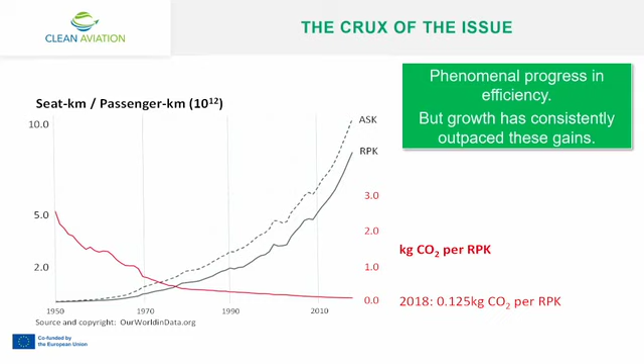In the installed base, we've seen an 80% improvement in fuel efficiency and energy efficiency. I don't know of any other sector that can compare to that. From 1989 to 2019, a 30-year period, looking at the exponential lines here, there's been a quadrupling of the aviation system in volume, and only a doubling of emissions. For a decade or two we've been able to say that's good performance, and it was good performance, but it's not enough.

If we're looking at a climate-neutral future, it won't suffice. So we know what we need to do. But where do we start? And how do we do it?

There's an old saying that when you're looking at numbers, there are such things as lies, damn lies, and statistics. I like this graph because it shows data from the International Council on Clean Transportation, the ICCT, and it tells us, I think, where we can find the next steps. So where do we go first? I think it's very revealing.

You'll hear very often that 80+% of the aviation system transports people or goods over distances for which there is no alternative mode of transport. It's probably true. But you'll hear it morphed into the statement that 80% of aviation is long haul. That's absolutely not true. Or that 80% of aviation's emissions are long haul. That's equally not true. It depends on how you define long haul. If I'm in my car, long haul is beyond Amsterdam, Brussels, because it gets annoying to travel further. If I'm traveling by rail, I don't mind Amsterdam-Paris or Brussels-Lyon, but then it gets a bit annoying. I think the consensus in aviation is that long haul is transcontinental as a minimum, maybe even intercontinental.

This chart is enormously informative because a third of aviation's emissions are on flights below 1,500 kilometers. A further third of those emissions are on flights up to 4,000 kilometers. And only a third are actually on flights with a sector length over 4,000 kilometers. The trend, if you look at 2050, numerous scenario studies actually point towards a further concentration in the short, medium range environment. That's important for us.

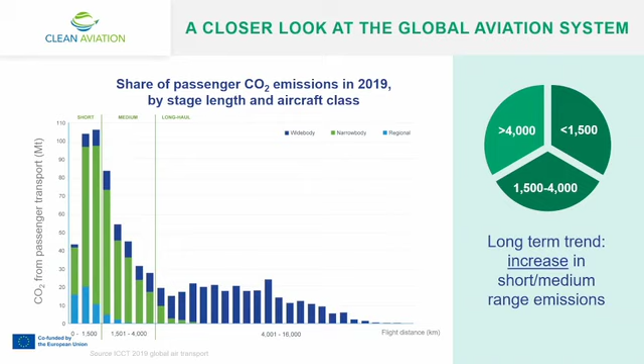Now, I know you could take the political line that we just stop flying over short sectors. And I would say dream on. If you look at the number of city pairs that aviation can touch, and the efficiency of doing so profitably, without massive infrastructure investment and the life cycle effects of that infrastructure, short-haul aviation will not disappear.

You can also look at it another way, cumulatively. Here I've overlaid the fuel with the actual cumulative number of flights over different segments, up to 500 kilometers, 1,000, and subsequently. Same ICCT data. The overlay comes from the Sabre computer reservation system, manipulated with our thanks by DLR, the German Aerospace Center. A couple of things are pretty interesting.

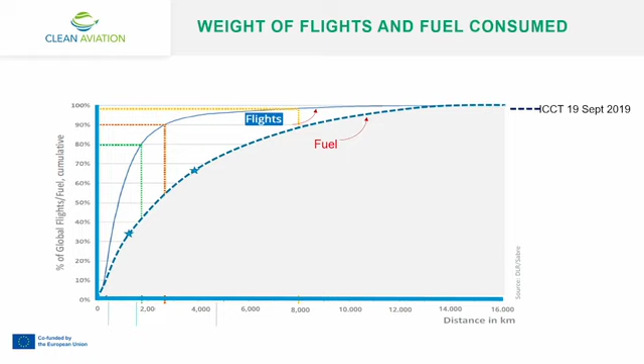Only 1% of flights are over 8,000 kilometers in length. We design long-range aircraft for 8,000 nautical miles. Ultra-long haul is therefore an even more marginal market if you're actually looking at city pairs. It used to be the case that flights over 8,000 kilometers consumed roughly 20% of fuel. But I think, again, it's a recognition of the performance of the sector that if you now look at the so-called big twins, the A350, the Dreamliner, the 787, it's actually a bit less, towards 15%. But it underscores where the first big steps are needed.

Again, another way of looking at this, so I've complicated the slide by looking at that. How can we move forward? One thing is, we've heard for decades that there really is no alternative to drop-in fuels. But if we look over a 30-year horizon, we can and need to be much more ambitious than that. We need to step away from things we consider sacrosanct or an idée fixe. Road transport has far more and much denser networks.

Transforming is more challenging. There are many more petrol stations than there are airports, believe me. But aviation already has several fuels, and it never really had only one fuel. Piston aircraft don't use the same fuel as jet aircraft. Obviously, Jet A is dominant.

But frankly, if Henry Ford had considered drop-in fuel the only alternative, the Model T would have taken a lot longer and would have burnt coal. It doesn't work that way. As they say, it's different strokes for different folks.

We think new architectures will find their way into the market, and we think it's clear that this will happen at the lower end of aviation - shorter range, smaller aircraft, short commuter, general aviation, maybe even urban air mobility. There's going to be a role for pure electric.

Some of that will be battery, some pure electric based on a hydrogen fuel cell. There's definitely a role for hybridization. We think there's a role hydrogen can play beyond fuel cells, in terms of direct burn gas turbine environments. As others would say, the rumors of the death of gas turbine are premature.

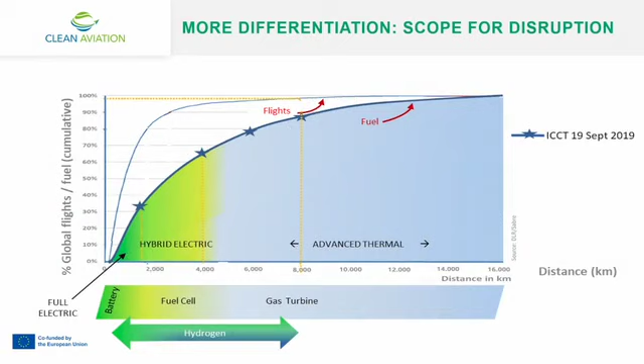They're going to be around for many, many decades. But the system is big enough to accommodate different solutions, and that is what we believe will be the case.

This is the only formula I'm going to show, and I will make no attempt to resolve it. It's classical - it's the Breguet equation. Usually it's used to determine the range you'll get out of a design given a certain payload, or conversely, what payload you get for a certain range.

But why am I showing it here? It shows the traditional levers we have decades of experience in and have made phenomenal progress in: aerodynamic efficiency, structural efficiency and weight, propulsion efficiency. The one constant throughout has been the energy density, and it can no longer be. We can't afford to maintain that as something sacrosanct, because it influences everything.

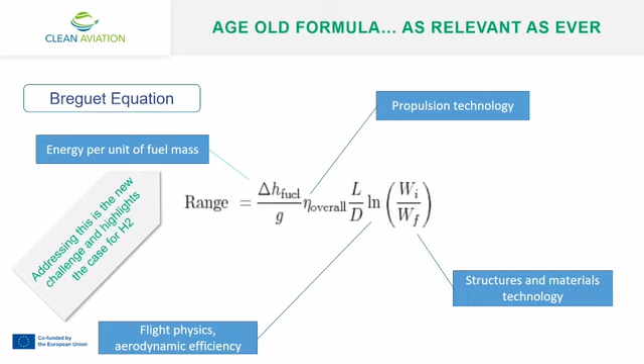It's often said that if kerosene hadn't existed in nature - which it doesn't, by the way, it needs to be refined - mankind would have invented it for aviation. It's pretty near perfect as a liquid fuel in the wings of an aircraft. But there are going to be other ways to solve the equation.

Now, stepping across to where to start and how we start - this is where I believe clean aviation can play a significant role, and I can get quite passionate about that, as can my colleagues and our members. As you well know, the European Union has declared a goal of climate neutrality by 2050, enshrined in its ambition and in law through the European Green Deal and the climate law. Along with the digital EU, these are the main drivers and pillars of the innovation cycle, of research and innovation, and therefore of Horizon Europe.

Clean aviation is an instrument within Horizon Europe. In the societal challenges, we'll find those all over the place - the Green Deal, climate neutrality, digitization. And a public-private partnership is a key instrument.

Clean aviation will build, as Axel said, on earlier work in terms of partnerships, so Clean Sky 2, building on the results, taking lessons also in how things were done and how to improve. And in the words of Sir Isaac Newton, we all know that when doing this kind of research, we're standing on the shoulders of giants.

So a lot of work previously, whether Clean Sky 2, whether in the important and significant work in national programs across the European Union area, or in earlier collaborative research work, many of the previous framework programs - all of this is relevant in terms of stepping stones towards where we want to go with clean aviation.

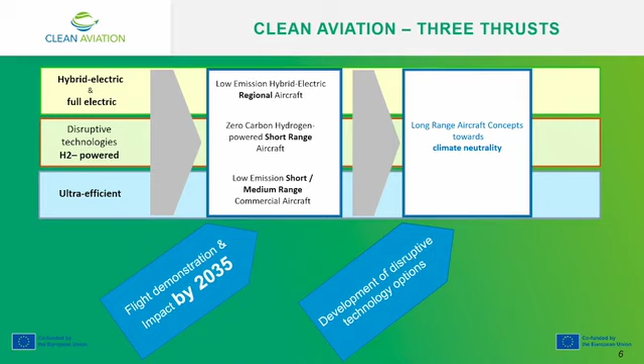I quote here John F. Kennedy. In his Man on the Moon statement at the time of the space race, he said, we don't do these things because they're easy, we do them because they're hard. A liquid hydrogen-powered commercial airliner, if that entered into service - if we fly that before the end of this decade - that is an Apollo-scale challenge. Europe's Man on the Moon moment is pretty much if we have that in service, and that's a European product. We should be darn proud of working on it.

Very briefly, the program structure. Our strategic research agenda, defined by the members, took a look at this and came back, very roughly, with a two-phase approach. First phase, up to roughly 2025-26 - our first call, as Axel mentioned, is a big bang, a big bite out of the first phase. That aims to cover a pretty broad palette, but linked to the three thrusts: regional, short-medium range single aisle, and hydrogen solutions. But it's a broader palette in terms of what concepts, options, and trade studies we need in order to determine the down-selection of things, because when we go from a study to a preliminary test, from a ground test to a flight test, the costs explode exponentially. So phase 2, from roughly 2025, will need a much narrower selection because we need to accelerate - we need to shift gears in phase 2 towards the end of the program, because we're looking at an entry into service prior to 2035.

Now, we can't go it alone. The program is 4.1 billion - that is, by the way, 1.7 billion in EU funding, 2.4 in private. So the leverage factor in doing this is very healthy.

But we're going to need to work on synergies, and I'll come to that in a moment. This ATO, authority to offer as it's often called, within this decade - because otherwise you won't have an aircraft entering into service in 2035 - is actually stated as an ambition in the regulation and is a key feature of this impact-focused program.

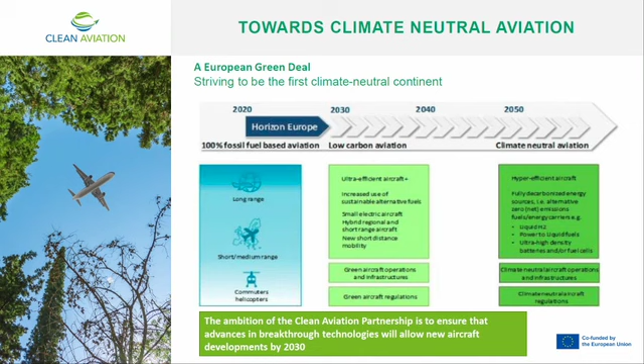But what is our contribution? What is our ambition in Clean Aviation? Our ambition, and part of the thrust that I will present to you, is to ensure that there are breakthrough technologies ready that will allow new developments by 2030. So we will have aircraft entering into service in 2035.

So these are the Clean Aviation three thrusts that Ron presented before. We will have these three sessions to give you a hint about the vision and what we are envisaging in terms of technologies for hybrid electric regional aircraft, for the short medium range, and also the disruptive technologies to enable the hydrogen powered aircraft.

This started with the strategic research innovation agenda that Ron also mentioned, starting back in 2020, creating a roadmap in order to achieve these goals of really having a product capable of entering into service in 2035 and able to replace 75% of the fleet. And the fundamentals of this roadmap are something I think most people in this room will agree on.

The fundamental point is that an aircraft is a very complex system and is safety critical. So if you want to introduce disruptive or innovative technologies so that they are ready for entry into service, for certification, you have to evolve in an integrated way and have an acceleration for technologies with demonstration and with an integrated view. That's why we have these two phases.

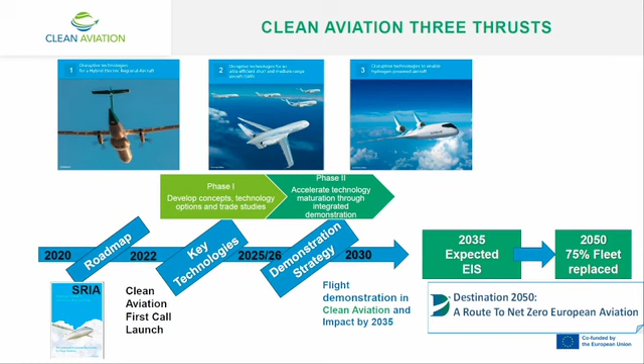And now focusing more on the short, medium range targets. So how we are implementing these objectives. First, which are the targets, and then how we are implementing them.

The targets are aligned to what has been presented before in other forums. So we are targeting to improve no less than 30% of the energy efficiency on a typical mission, compared to the 2020 state of the art.

For what is a typical mission that we are targeting? The typical mission is a segment capacity from 100 to 250 seats and up to 3,700 range. Ron presented some pictures on why we are focusing on that area, but just to give you a takeaway, this contributes to 2/3 of the global emissions for flights. So it's really an important area where we need to focus in order to bring impact, because Clean Aviation is an impact program.

And to do so, contrary to what we could do for smaller range, smaller missions where you could use hybrid electric solutions — and maybe I can recall for those who have seen the IFAR presentation this morning, the first one, there was a nice chart about the electrical battery limits — really, what the batteries can bring us, electric solutions as a single core energy source for short, medium range, are not ready, are not enough.

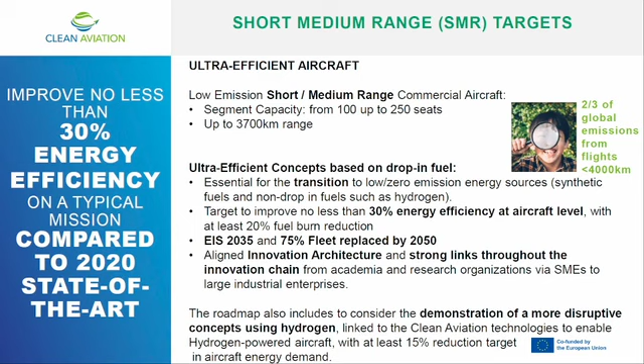To achieve all that, it's very important to have an integrated approach with an innovation architecture, making strong links between technology development and product development and certification. So we think our program could really be a forum where we can strengthen these links between academia, research organizations, SMEs, and large industrial enterprises.

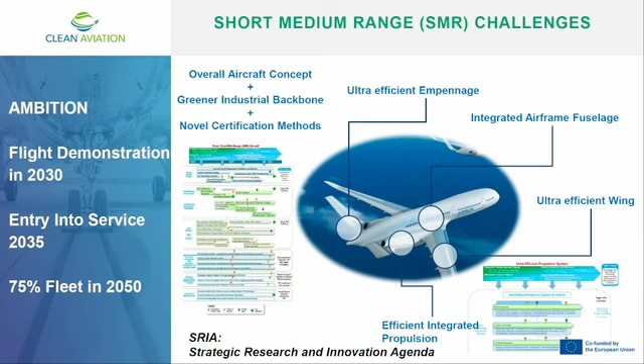Which are the challenges we have in front of us to reach this ambition? First of all, overall aircraft concept, also a greener industrial backbone so less waste, reduced manufacturing timeline, and novel certification methods, together with the classical ultra-efficient empennage design, airframe, fuselage and integrated systems design, ultra-efficient wing, and last but not least, efficient integrated propulsion systems.

If you have seen the call one that we have launched, maybe after what I explained it's clear to you that we have three main topics focused on short and medium range, up to 207 million, and then two transversal areas that will be focused on developing the aircraft concept and also the novel certification methods that are needed.

I will go a little more in detail about the type of technologies we are aiming for each of these topics. For SMR01, which is the ultra-efficient propulsion systems, the proposed solutions and technologies are expected to start at TRL 3 and be able to achieve TRL 5 at system level.

So they are ready for ducted or unducted engine architecture. Christophe was presenting before for Clean Sky 2 what are the types of architectures that have been explored. There are also core engine and combustion technologies investigation that are expected to reach TRL 4. There are three main areas for the benefit, which are clustered in smarter engines, lighter engines, and cleaner emissions.

Smarter engines - there are some examples here, like variable geometry, so pitch multi-blade devices, or finding the optimum conditions for different flight modes, electrical machines for the transmission systems, innovative thermodynamic cycles, or changing the way of controlling the engine, for example with artificial intelligence.

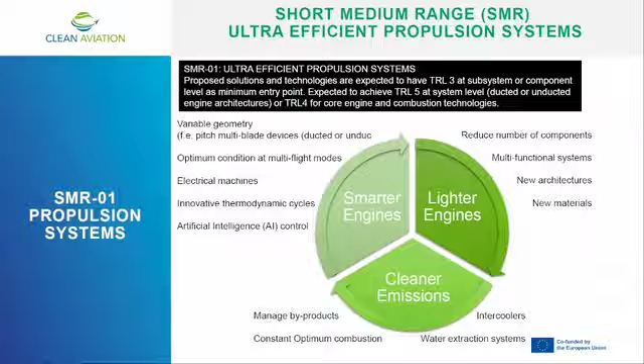And cleaner emissions, so not only CO2 but other types of particles that can be reduced, managing byproducts, creating new ways of dealing with the water extraction system, reducing contrails, changing the way of combustion so you always get an optimal combustion and reduce your emissions.

So these are the three areas that we will focus on in the propulsion systems.

For the ultra-efficient airframe, I put here together the wing, fuselage, and empennage, even if they are two different topics in our call. So again, some examples here, how we will reach a maturation for TRL 4 or higher in order to get ground test and also possible scaled flight test demonstration for these technologies.

So we aim to achieve new materials. The multifunctional fuselage was presented today - this could be like a taste for you about what could be.

Integrated structural elements, so the systems are even more complex in the new aircraft concept, so we need to get a more integrated airframe in the end. Modularized concept, something that is more standardized, more changeable, and we can evolve for the future to new configurations.

And then also optimization of load distribution in order to reduce the weight and the drag.

Sustainable industrial system - you remember I mentioned one of the objectives is also to have a footprint in the green industry, and what is the effect of the new technology that we're introducing in the life cycle of the technology.

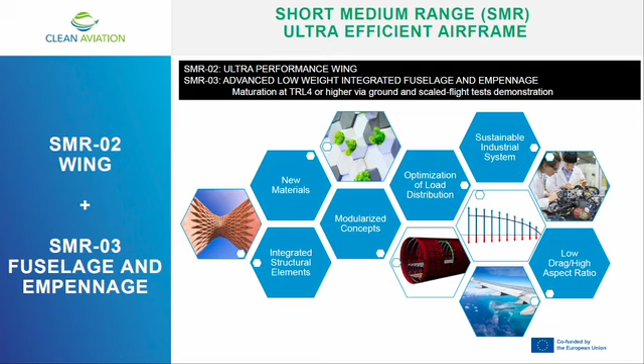And last but not least, of course, the low drag and high aspect ratio solution that has also been mentioned before from one of the Clean Sky 2 outcomes.

I'm so excited to go to phase 2 that I put phase 2 here, but actually we are in phase 1, which involves selecting from all the technologies that are promising and that we can evaluate for their impact on greenhouse emissions and on life cycle optimum solutions. We have to down-select with the view that this has to be integrated in a full aircraft concept, able to be certified.

And that's why we need to explore also new means of compliance, maybe challenge the requirements that we have. If we are asking for a high aspect ratio, as Jerome explained before, you are near the flutter area, you have to introduce flutter control. This impacts certification, and we have to take all these concepts into early design.

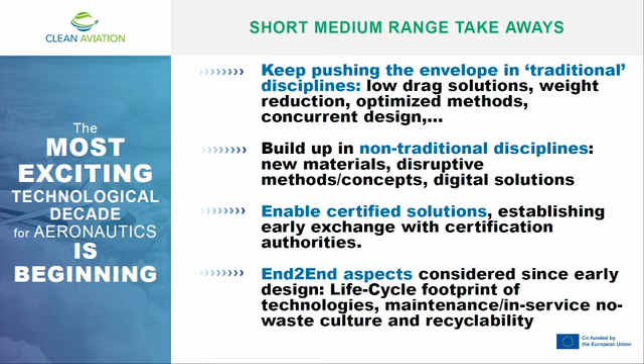Last but not least is the end-to-end aspects that we need to include in early design, in order to establish the life cycle footprint of the technologies we are offering. When you enter a new technology, you need to evaluate if this is adverse for the different systems in the aircraft integration and for the overall aircraft view, and the maintenance and in-service impact - if we are proposing the adequate no-waste culture and recyclability for it.

So this is our ambition. And I wish that most of the people in the room will follow us and engage with our projects and be part of the new generation of aircraft. Thank you.

Thank you, Maria, for giving us an insight into the SMR thrust. Are there any questions? Are there comments? Do you think that's realistic? Do you want to be part of it?

Yes. Yeah, thank you for the question. I did not elaborate much on that, so I will do now. So actually, it's at aircraft certification level.

So we have first to review if the means of compliance that we have today are enough. We are starting with more in the CS25, closer to our European perimeter, but it will be applicable to FAA rules. So the ambition is to be able to present something that will be workable also outside Europe, because we have a worldwide flying fleet. So it's aircraft certification, and we will be evaluating if the current means of compliance are enough, if the requirements we have are adequate.

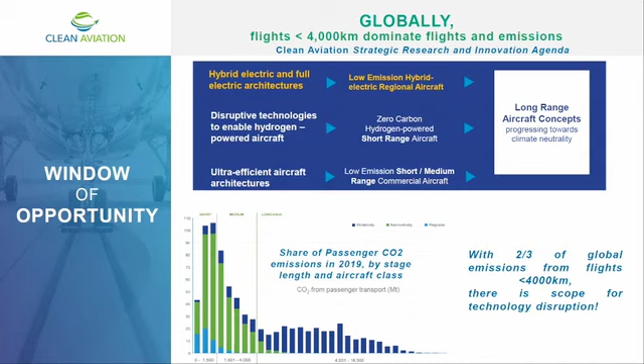In terms of market share, regional aircraft cover overall 12% of available seat per kilometer. In terms of connectivity, 40% of existing airports mainly rely on the operation of turboprop regional aircraft. So although the regional aircraft sector only contributes 5% of aviation's global emissions, in terms of market share it clearly plays an important role. We expect that if we succeed in the program I'm going to show later, this market share may even further expand.

The ambition of Clean Aviation in the hybrid electric regional stream is to develop technologies and innovations that, when integrated into a regional aircraft of 50-100 passengers, enable fuel burn reduction of a minimum 50% compared to reference aircraft. According to the planning, in the first phase of the program until '26, we will mainly mature the major technobricks. The final demonstration in the second phase, by the end of the program, is a hybrid electric regional aircraft integrating the most promising technologies which have the potential to enter into service by 2035.

As said by my colleague, to achieve the desired goal we need to continue pushing all the traditional disciplines in aeronautics, but for the hybrid electric regional segment we clearly need to open our minds to new ones.

We need to continue investing and developing our manufacturing capabilities, from one side toward the development of a lighter structure important for this kind of aircraft, and from the other side to secure our manufacturing capability to finally afford the fleet replacement expected to take place from 2035 onwards. In this respect, life cycle aspects and recyclability are considered important as well.

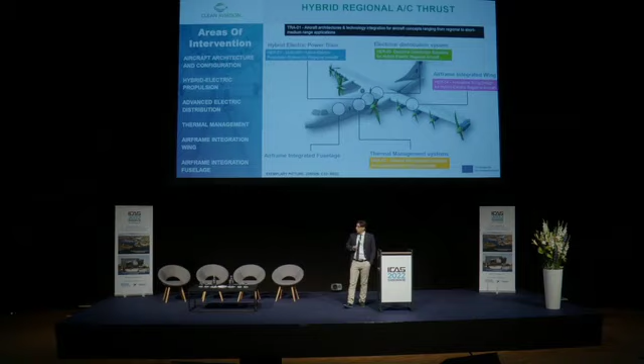Concerning the hybrid electric regional stream, how are we going to achieve the desired goal? We have clearly identified the areas of development, the areas of intervention, the enabling technologies: the hybrid electric powertrain, the electrical distribution system, the airframe-integrated wing and integrated fuselage, and the thermal management system.

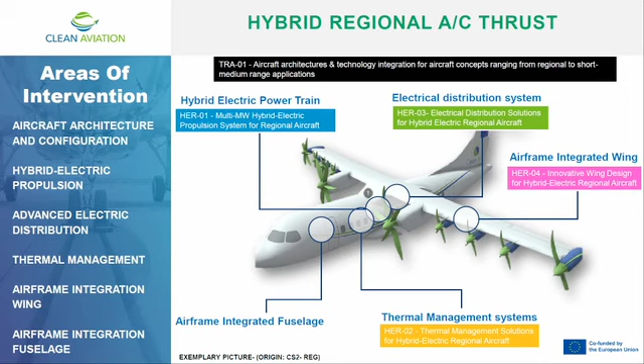As mentioned by Ron before, we have recently launched the first call covering 700 million euro for 14 topics. Focusing on the hybrid electric regional stream, we can identify 5 topics with an overall budget of more or less 200 million euro, covering almost all the mentioned areas. We will enter into each of the topics in a moment.

Focusing now on the powertrain, I guess we all recognize the big improvement made in the last year in terms of efficiency in electrical propulsion and related technologies—fuel cells, batteries, electrical motors. However, we must recognize that not all the technologies developed for small aircraft can simply be scaled up to larger aircraft.

Meaning technologies that are now available and integrated in 2-4 pax passenger aircraft are not going to scale up to large regional aircraft of 50-100 passengers, 1,000 kilometer range. An evident limit is energy storage. The specific energy of a battery today is between 150 to 250 watt-hours per kilogram—a big improvement is expected in the coming years, but it will still remain far away from the specific energy of fossil fuel, which is more than 10,000 watt-hours per kilogram.

So that said, we recognize that the full electric aircraft in the regional domain is on the table, but far more likely to be fuel cell-based rather than battery-based. In this context, hybridization is seen as a good opportunity, an option where the power from fuel burn is reduced via electrical boost power provided by the electrical motor.

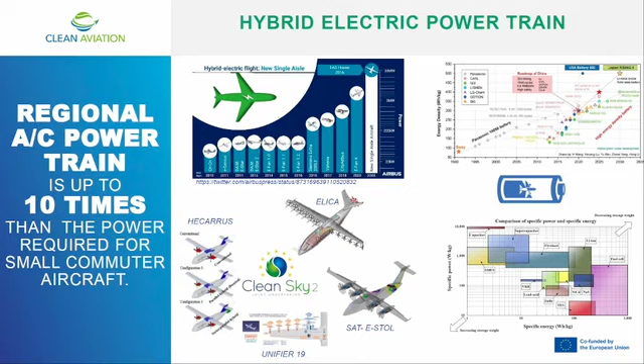All this aspect will be covered under the HER-01 topic, the multi-megawatt hybrid electric propulsion system, where we target to deliver a hybrid electric multi-megawatt propulsion system able to deliver a total shaft power between 4 and 10 megawatts. The propulsion system may be composed of a multi-powertrain module with a minimum power of 1 megawatt. The ambition is to develop an architecture able to deliver no less than 30% of gas emission reduction compared to the reference propulsion.

There is no single option, no single path, so different configurations need to be assessed - parallel, serial, a combination of the two, different levels of hybridization. The final target for the first phase is to reach at least TRL4 at the powertrain level, or higher, with a clear roadmap toward TRL6 by the end of the program.

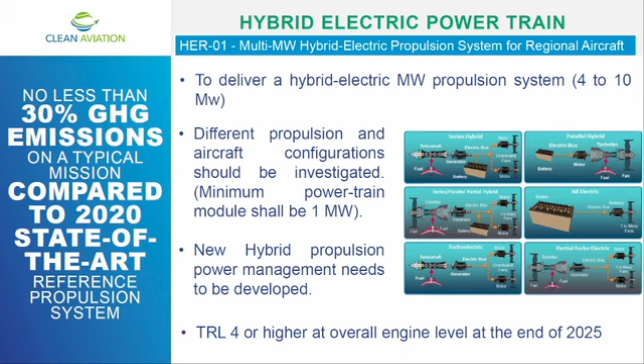Moving to the electrical distribution system, it's interesting to recall the trend of electrical power capacity of aircraft over the last years. The Boeing 737 started its operation with a power capacity of about 80 kilovolt-ampere, around 100 kilovolt-ampere, and in the following years no big increase in power capacity was seen. In fact, the power capacity only reached 200 kilovolt-ampere in 2000, and only in recent years have we seen a big increase in power capacity and demand in aircraft.

This is from one side to accommodate the entry into service of more electrical systems, and on the other side, of course, to support the entry into service of larger aircraft.

However, when hybrid electric multi-megawatt aircraft are concerned, the first issue that comes to mind is the integration and usage of high voltages and high currents in a constrained environment. Power electronics need to operate under unpressurized conditions, low air density, and many challenges need to be considered, such as arcing, magnetic interference, insulation issues, and partial discharges of electrical components.

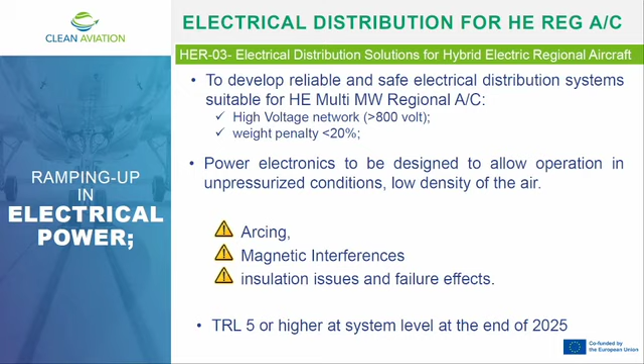Moving now to the thermal management system. Conventional propulsion systems mainly dispose of all the thermal loads through the exhaust gases, while the remaining thermal sources are driven away through conventional heat sinks - oil, fuel, air.

However, when hybrid electric systems need to be integrated into the aircraft, one of the major challenges is the waste heat from the electrical components. Just an example: fuel cell efficiency is in the range of 40-60%. This means that 1 megawatt of fuel cell integrated into the aircraft will finally result in more than 600 kilowatts of thermal energy that needs to be dissipated. Overall, for a hybrid electric regional aircraft, we estimate about 1 megawatt of thermal loads need to be dissipated, compared to today's 50 kilowatts.

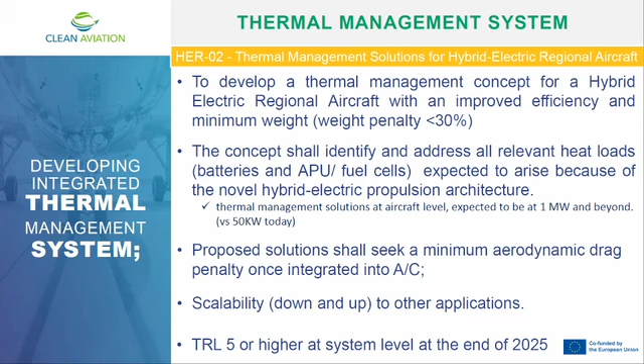In terms of comparison, we are moving from a house to a village. All these aspects will be tackled in HER-02, where the ambition is to develop a thermal management system for a hybrid electric regional aircraft with improved efficiency, and again with a weight penalty less than 30%. The target here is to reach TRL5 by the end of the first phase, and TRL6 by the end of the program.

We are moving now to the airframe. For what concerns the previously mentioned enabling technologies, we must recognize that they are enabling technologies, so we need integration of this technology to achieve the desired goals at the aircraft level. However, they will also bring extra weight. New components, bigger components, heavier components need to find space in the overall aircraft architecture and airframe, and this extra weight needs to be compensated in one way or another.

Clean Sky 2 is now in the delivery phase of the program, where major results will be delivered and the viability of certain solutions will be confirmed. So we believe it was worth waiting for these results before launching a specific topic on that. But clearly, this is one of the aspects that needs to be addressed in the near future.

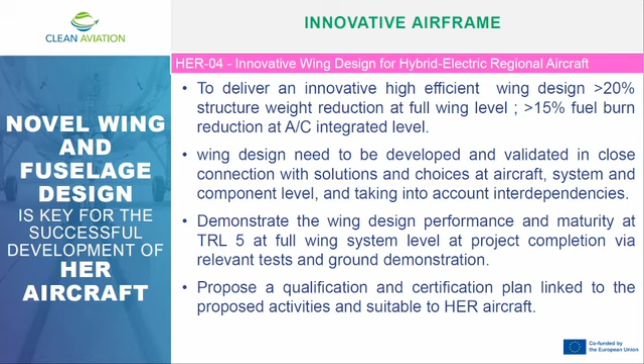To achieve this goal, optimal solutions from an aerodynamic point of view need to be combined with structural ones. The final ambition is to reach TRL 5 at the end of the first phase, with the ambition of reaching TRL 6 at the end of the program.

We are now moving to overall aircraft design and performance assessment, which is the aspect addressed under TRA-01. Here the ambition is to develop and deliver, up to a typical preliminary design review, a high-potential disruptive hybrid electric regional aircraft which integrates all the mentioned enabling technologies. Clearly, we may envisage the need to open the design space to new aircraft architectures.

This is needed, on one side, to meet requirements coming from the integration of different subsystems and enabling technologies, but on the other side, also to identify new optimal points in terms of operation, mission, flight physics, and aircraft performance.

Here, the overall ambition is to reach 50% fuel burn reduction, to develop a configuration that is able to deliver more than 50% fuel burn reduction for a typical regional mission compared to a 2020 state-of-the-art reference aircraft.

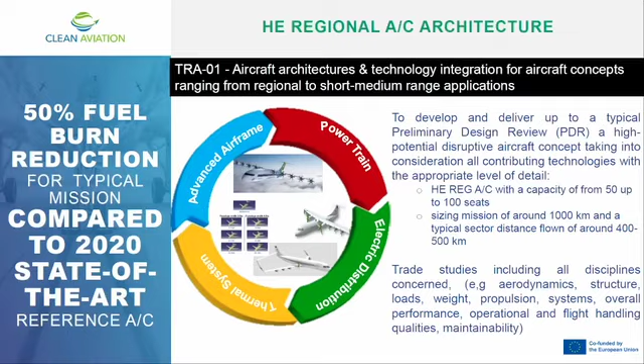Well, I'm at the end of my presentation. I hope that, with the best of my capabilities within the given timeframe, I was able to show you the main features of the hybrid electric regional stream in Clean Aviation, but also some of the main challenges.

However, I want to share our optimism. We are not starting from scratch. Many capabilities have been developed over the last years in Europe, in previous programs, and are now available to support implementation of this program - capabilities in developing novel aircraft architectures, more efficient propulsion systems, advanced airframes. Let's not forget our testing capability on ground and in flight to validate and mature our technologies in a relevant, real environment, and finally let's not forget all the skills and competencies that have been developed and are now available in Europe and across the world.

Our ambition is to collect all of them and make them work together toward a successful but also impactful program. Thank you.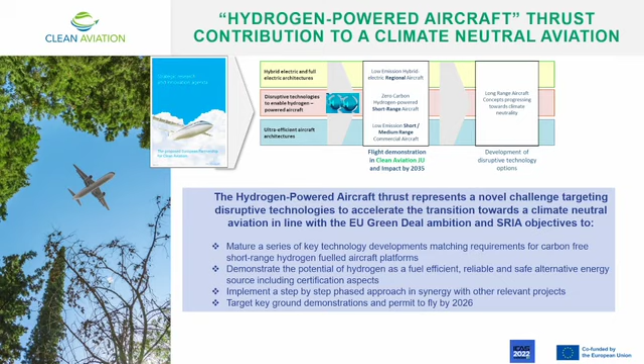During the first phase of the project, I will explain how this step-by-step approach will happen, because it will take a lot of effort to select the most promising technology, but also a lot of interaction within clean aviation and with other synergies we can activate. The target is to achieve a series of key ground demonstrations by 2026, by the end of the first phase of clean aviation.

Here I'll mention some of the challenges I had in mind. We can start with the first: hydrogen's potential, due to the fact that it's a high energy source. It will of course contribute to eliminating CO2. But we know the volumetric energy density is a challenge, particularly in bringing hydrogen onto the aircraft and then storing and distributing it inside the aircraft. This means a coordinated effort and a holistic assessment at the beginning of the project will be needed to overcome this big challenge.

Also, most of the technologies are starting from not quite high TRL levels. Some of the technologies are coming mainly from other sectors, like the energy sector and space applications. We have, for example, cryogenic pumps that work in space applications for only a few tens of seconds. Here we are talking about a different environment, so it's a big challenge.

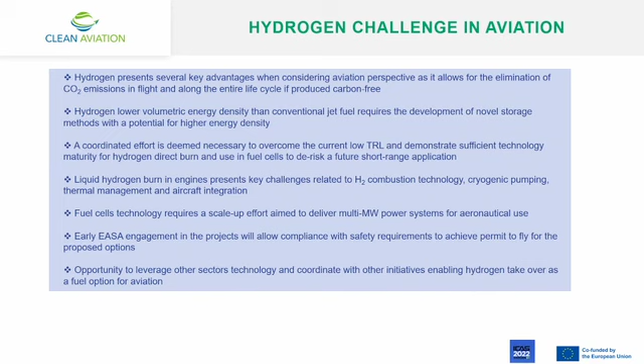So this is the introduction about the challenges. I've already talked about the synergies, so I don't want to repeat myself.

This is a dense chart, but to help summarize: on the left you have the strategic research and innovation agenda roadmap. It was quite high level, but already depicting the target, with a big focus over the end of phase 1. In the middle we have the roadmap, which is available in our work program. The part on the left is phase 1, 2025, and on the right in gray is phase 2, 2026 till the end of the program. You can see how dense this roadmap is and how many opportunities and links we have.

In order to deliver the objectives of phase 1, shown on the right, there is a series of ground demonstrations. So we'll have a ground demonstrator proving hydrogen direct combustion.

So we will have teams that will work on using, for example, donor engines already available, so turbofans or turboshafts, but adapting them to run on hydrogen, together with all the challenges related to the aircraft systems, basically the ones related to engines, fuel systems, but also the fuel system at the aircraft side, and also the cryogenic systems, distribution systems, the conditioning of hydrogen to have it at the right physical conditions at the injectors in combustion, in gaseous form. So it will be a huge effort to do that.

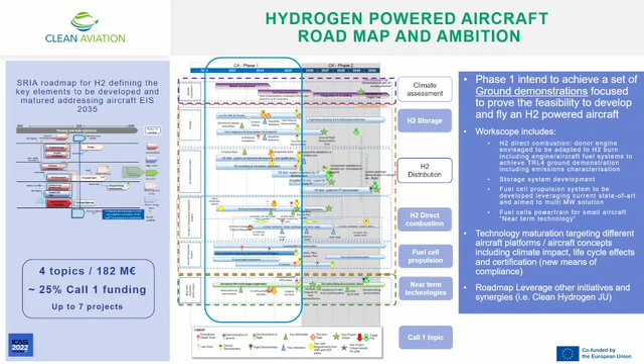This chart is reminding that hydrogen-powered aircraft is really connected to the other 2 thrusts that my colleague presented before, so the short, medium range, and the hybrid electric. So the 3 main areas are direct burn, storage and distribution, and fuel cell propulsion systems. What you see in the blue box at the bottom is the range and payload objective using hydrogen, for example 2,000 nautical miles and 200 pax, and 1,000 nautical miles and 100 pax for a regional. This is, as you may understand, a very demanding objective.

So unfortunately, in this case, the program is not so much leveraging Clean Sky 2 technology because it's a new challenge for Clean Aviation. So we can use only partly Clean Sky 2 technology, and we're trying to do the best. But this is really related also to the transversal activity at the bottom in the black box.

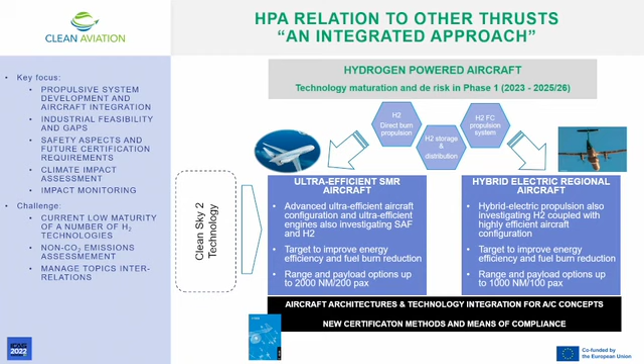You have the so-called transverse activities, mentioned already by colleagues, that are the aircraft architecture and technology integration, and the new certification methods. In particular in the first one, the architecture and technology integration, the airframers will define the aircraft concept, taking into account, as Maria said before, possible concepts that could use hydrogen compared to the technologies proposed for the project, and also the maturity of this project and proposal, and the implementation in the first phases, in order to continue performing a gap analysis that will allow the project to contribute at the end to reach and exploit the maximum from the hydrogen thrust.

Here I would like to present the call one topics. This is a summary slide. There will be a few slides just after for each of these topics. So as said, yes, we have a big topic.

The first is direct combustion of hydrogen in aero engines. It's a topic with 115 million funding, willing to fund up to 2 proposals. Then there is the multi-megawatt fuel cell propulsion system for hydrogen-powered aircraft, 50 million funding and 2 proposals. The third one is storage, dedicated to large-scale, lightweight, liquid hydrogen integral storage solutions, 10 million and 1 proposal.

And the last one, as said before, is near-term disruptive technologies for hydrogen-powered aircraft, the project addressing hydrogen implementation into small aircraft, 7 million euros and up to 2 projects funded.

This is a chart a bit dense, but just to provide you a summary of what was put in the topic to answer and support the roadmap and the work plan of Clean Aviation.

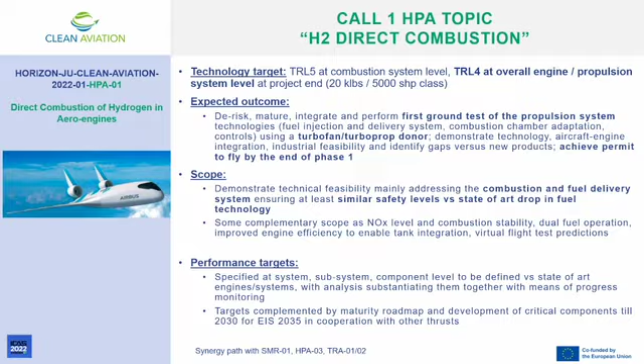So I would not say more on this, just not to be too long. The objective, of course, is in line with Clean Aviation, to mature hydrogen systems by the end of the program, targeting entry into service by 2035. The second topic is the one addressing multi-megawatt fuel cell propulsion systems.

Yes, this is also a big challenge. The entry level of TRL is TRL3 at subsystem component level, and the target is similar to the previous one, TRL4. We're talking about scaling up fuel cell power systems at the multi-megawatt level, and leveraging all the experience that is already available, plus also synergies, as mentioned before, with for example the Clean Hydrogen Joint Undertaking, which is bringing up and accelerating technologies at component level for a fuel cell.

Again, here we have the challenge of the storage of the hydrogen, and the challenge of the distribution of the hydrogen. We are looking also for some kind of common solution, just to have quite common approaches - not so different - for example in direct burn or in the fuel cell, to develop in the end a solution that could serve both purposes with some adaptation, of course.

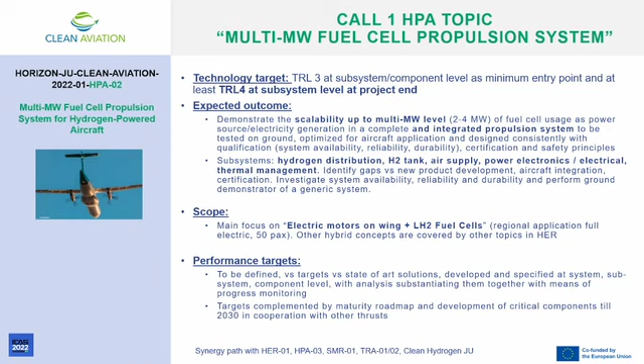The third one is the liquid hydrogen integral storage. It's a separate topic, but it is really integrated with the previous two. We decided to launch a separate topic to allow the partners to provide the most of the innovation and ideas into finding also some common solutions.

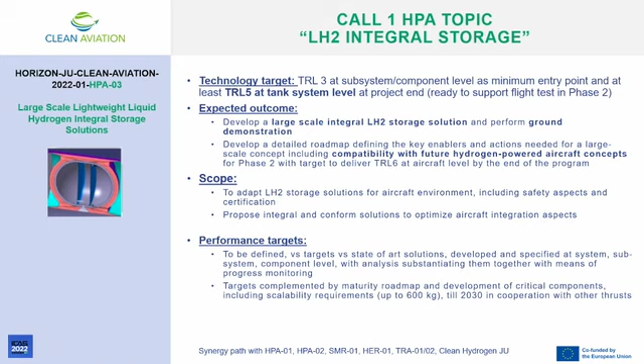The objective is still TRL5 at tank system level, and the objective is to adapt this technology for phase 2, when we will fly a demonstrator in line with the other two thrusts. So also a big challenge here - for example, we are looking to integrate the tank solution into the airframe structure. So there is a lot of interaction with the airframer as well, to find the optimal solution to save weight and to provide a more integrated approach.

The last one is the near-term disruptive technology for small aircraft. Again, here we are intending to progress from TRL3 to TRL5 by the end of the project, and the partners will work on an integrated propulsion system at TRL5. In this case, we are talking about 500 kilowatt power systems based on fuel cell.

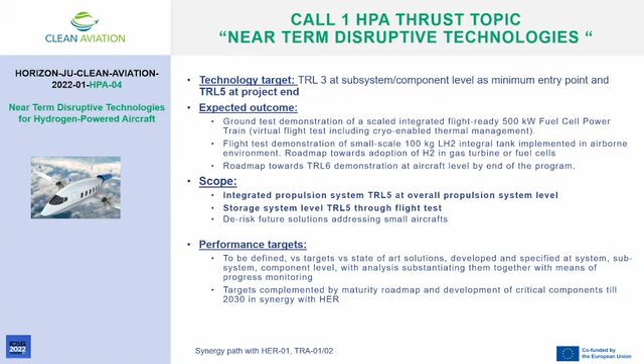And yes, there is also a part of the project that will deal with tank research in the order of 100 kilograms. So this is more for small aircraft, but this could be a small project that could provide good value in terms of solutions - solutions that could also later on be scaled up to a higher level.

I jump here to conclusions. Hydrogen is, of course, considered a very promising opportunity to enable emission reductions in the aviation sector.

It's very interesting because it will involve propulsion systems, a lot of aircraft design interaction, and also certification that is starting basically from a clean sheet at this moment. So everything needs to be developed.

Call one will support ground demonstrators by 2025, early 2026, to be further exploited, targeting a possible entry into service of aircraft in 2035.

Close cooperation with the other thrusts was stressed, and EASA involvement from the early phases, so we are willing to see in the proposal that was received this engagement, which is, of course, willing to be done by the partners.

And then we will have still the next calls. Next calls that could involve potential partners will be defined soon and will be launched in the near future. We hope that this hydrogen solution will be good enough to move from phase 1 to phase 2 and to be able to scale up the technologies.